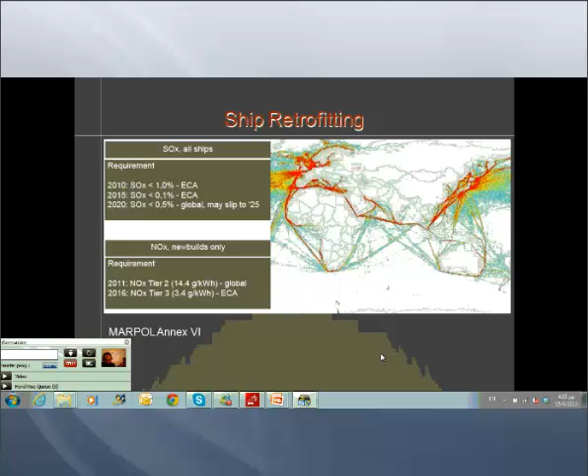However, there are some possible future ECAs which will of course take some time to be developed, and we are not sure yet about the actual time where these regions will be declared as ECAs. So one possibility is of course the Mediterranean Sea, and there is doubt on whether it will be a unified ECA region, or it will start with some smaller sub-regions and then develop further. For example, starting from the Adriatic Sea or some other specific region.

So other ECAs maybe are also estimated, maybe in Japan or in Singapore, or in the northern part of Norway, or even in the southern part of the United States.

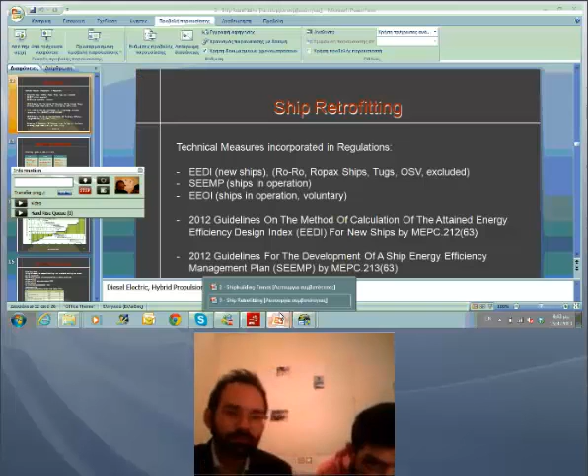Okay. So to continue, most of the ships in operation at the moment are starting to comply with the SEEMP requirement. So they have developed plans and they are carrying them on board. However, as this was, let's say, a compulsory action as we defined before, most of the operators are doing this without gaining any benefit and simply by implementing the regulation.

However, there are also more sophisticated operators that are trying to make the best out of the SEEMP regulation and also using the voluntary EEOI index in order to monitor their operational efficiency. Also, there are now a lot of ships built under the EEDI calculation, and there are new standards being developed for the actual certification of ships with the EEDI and the actual sea trials in order to verify the EEDI power

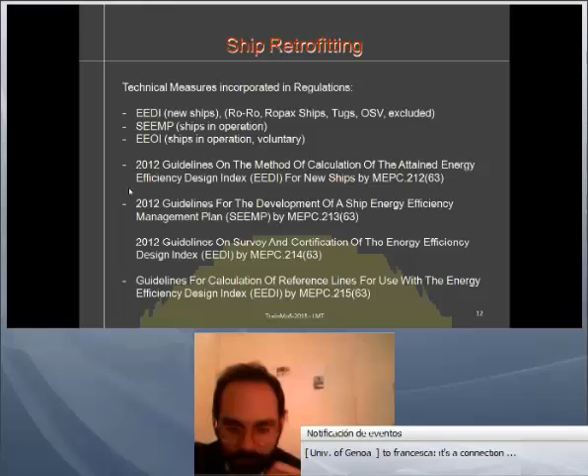line references. However, there is growing concern in the industry about the EEDI regulation and the possibility of having underpowered vessels in order to comply with the regulatory framework. So there is continuous research upon that in order to see what will be proposed for the future.

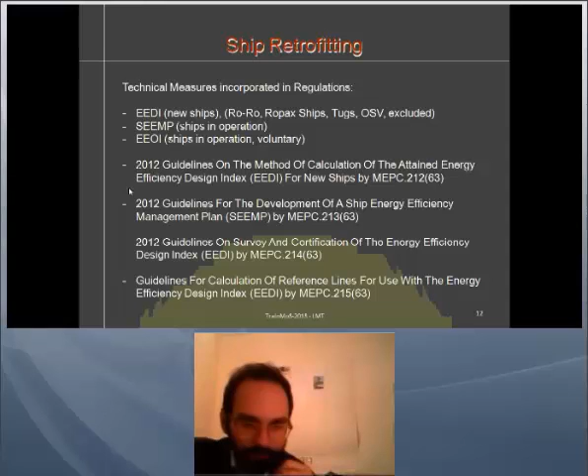So, retrofitting options to meet the SOx limits imposed by regulations. Firstly, we have LNG as a fuel. We have the use of marine gas oil.

Okay. So what are the differences between those three options? Firstly, LNG as a fuel. We said that, according to studies and prospects from manufacturers, shipbuilders and also designers, there is a significant retrofitting cost coming with the use of LNG as a fuel.

However, there is the importance of LNG fuel being at a lower price at the moment than heavy fuel oil, and it is also expected to remain lower than HFO in the future. However, there is an uncertainty about the spread between LNG, low sulfur fuel and heavy fuel oil, and we are not sure about the prices in the future.

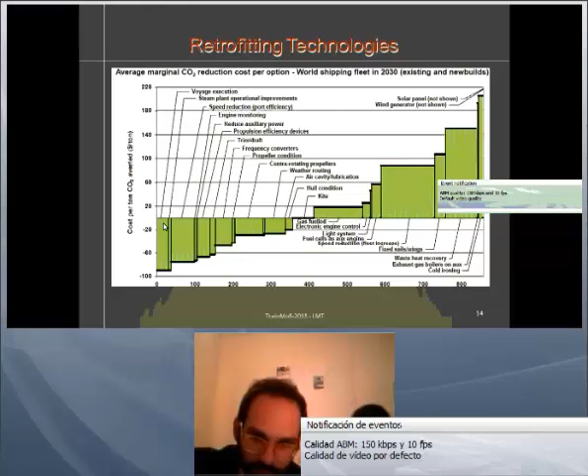So on the other hand, we have other measures that can be much more intensive in terms of cost. So let's say gas fuelled, that we said before, and then using fuel cells, wings, or waste heat recovery for exhaust boilers, or cold ironing, which actually depend very much on the state of the technology, or even on the infrastructure available for each ship.

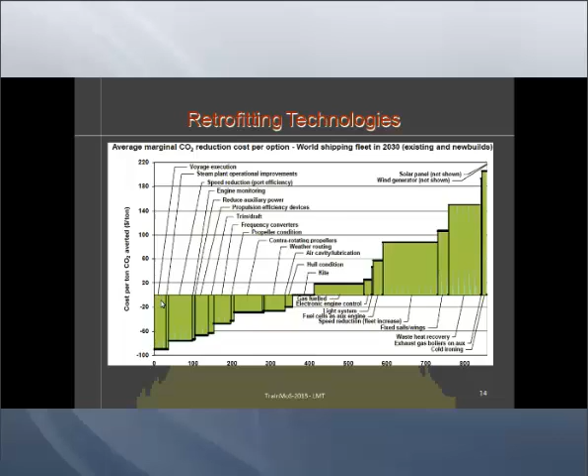So the market of retrofitting is expected to have a major uptake during the next years, and this is due to the regulations that are imposed, and the compulsory retrofitting that most of the owners need to do. So if we see the requirements of the IMO, the potential types of ships that need to be retrofitted are ships above 400 gross tonnage constructed before 2005, and of course also oil tankers constructed before 1996. Passenger ships are counted, and also ships constructed to carry ballast water before 2009.

Some insight on retrofitting technologies. For example, here we have a screenshot of a work on optimizing the bulb of an existing vessel. So as you can see here, it's evident that we need to take into account, as we said earlier, the main constraints of the vessel. You can see in the picture that the main vessel is kept intact, and we need to optimize for a bulbous bow that will fit into this existing vessel with existing dimensions.

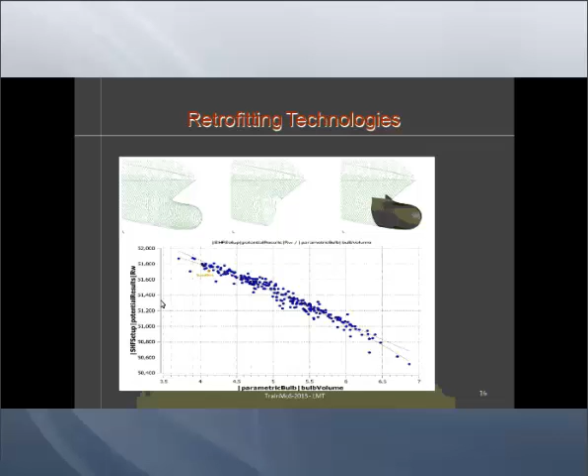Moving on with hydrodynamic optimization, there are various possibilities to enhance the fuel efficiency by using efficiency devices in the aft part of the vessel, like the Mewis duct or other kinds of ducts that improve the wake field of the vessel. Also retrofitting, for example, the skeg of the lower part of the vessel in order to improve the flow to the propellers. And of course, doing that in a simulation-driven environment gives you the benefit of creating a big number of variants and using the most optimal one.

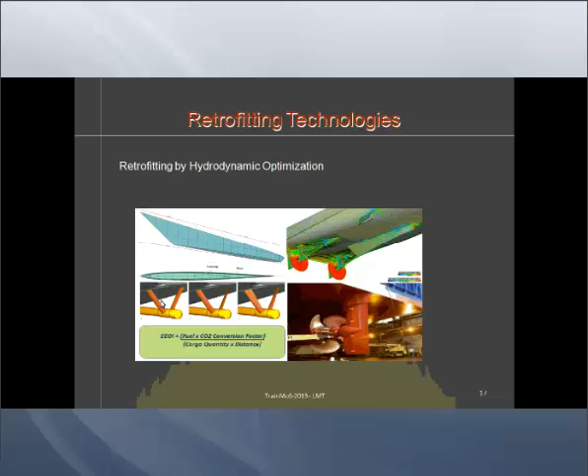Now we move on to retrofitting with scrubbers. Scrubbers have been used for a long time in the land-based industry, and they're more or less compulsory for big factories, mainly in Europe and America.

However, now they're gaining some part in the shipping industry due to the need of reducing the SOx emissions. So scrubbers mainly are used on the exhaust of the ships, and so let's say that fuel emissions are passing through the scrubbers, and the SOx elements are in a way neutralized, and their percentage drops to the required one.

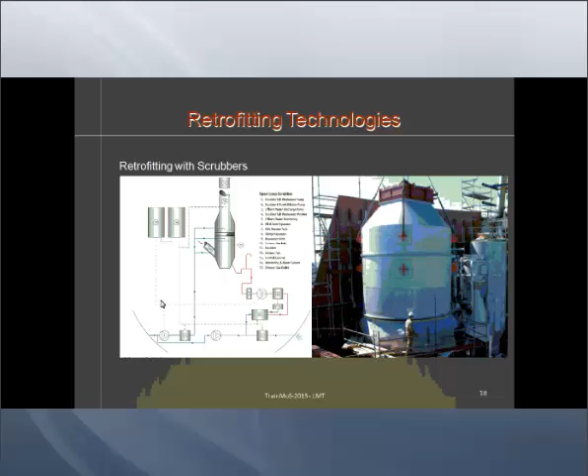So there are different types of scrubbers. There are the open loop scrubbers, the closed loop scrubbers, and also hybrid scrubbers. The open loop scrubbers use water, and also they use a catalyst, and then they need to discharge the water. While closed loop use mainly fresh water, and they keep it in a closed loop discharge. And there are some hybrid methods at the moment, and also some other methods that are still under development.

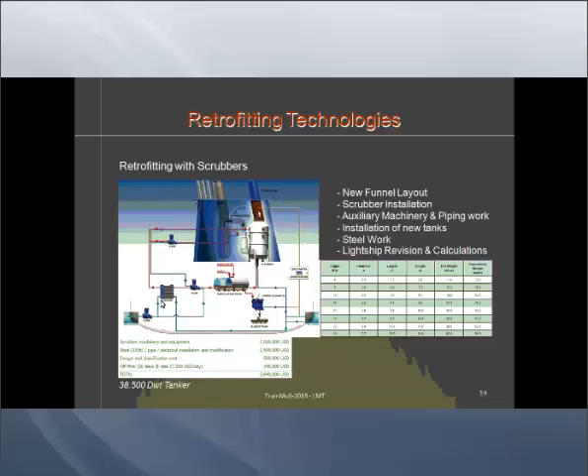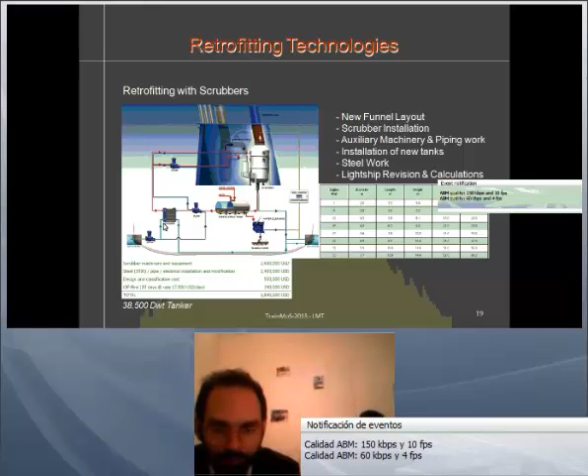However, the scrubber industry in the maritime is not very mature yet, and we expect to see big improvements in the future of this technology. However, retrofitting with scrubbers is a costly job, and it's very demanding. You need to account for a new funnel layout. You need to account for scrubber installation. Auxiliary machinery need to be put within the same scrubber, so you have multiple exhaust scrubbers needed, and there is also piping work to connect those.

Also, there is a need of installation of new tanks, mainly a circulating tank for either the open or the closed loop water. There is use of substantial steel work in order to extend and close the scrubber structure. And from that comes a lightship revision, and new calculations need to be done with regards to the vessel stability and statutory approval. And there is a possibility that due to the increase of weight, the vessel will possibly need to do an inclining experiment, increasing the cost. And also the added weight is reducing the deadweight of the vessel.

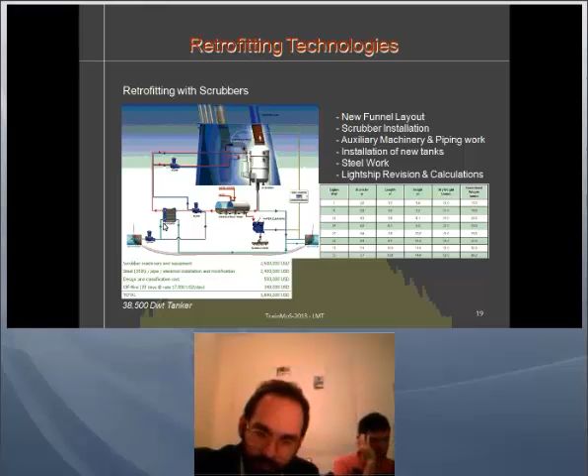So we can see here a case study from this organization called Green Ship for a 38,500 deadweight tanker, about the installation of a scrubber system. We see that the estimated cost was about $6 million, which is a substantial cost for retrofitting such a vessel.

And also in the graph here, you can see how the scrubber dimensions are changing according to the engine output. So this means that for vessels with a big engine output, the scrubber would be very large. Even for small vessels, the systems will be heavy for them to carry. So this is a big disadvantage in the scrubber technology, and will need to be addressed in the future for this technology to be sustainable.

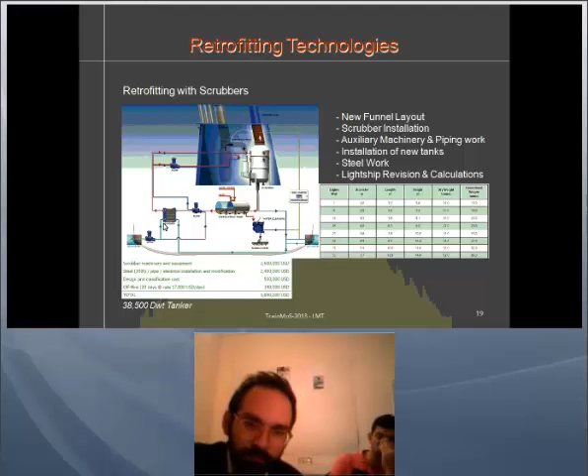Then you need a new fuel supply system. You need to remove the existing pipe to reconstruct piping delivery to the dual fuel engines. Also construct foundations for the storage tanks, and in general a lot of steel work. Again, you need to have a lightship revision and possibly have a lot of statutory work in order for the vessel to comply with the regulations after the changes it has.

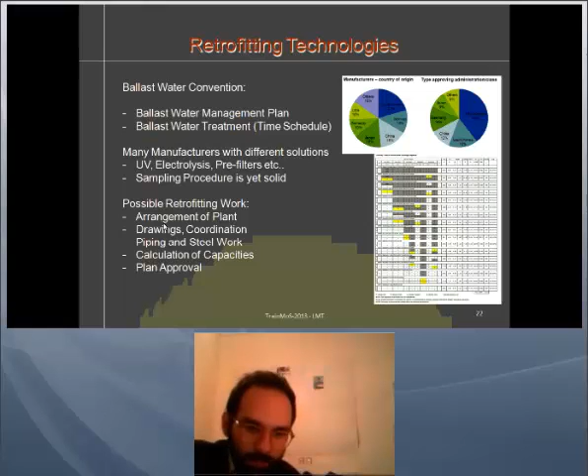So to conclude, expectations for the retrofitting market by 2020, 2030. Well, hopefully the economy will recover, starting new shipping and shipbuilding prices, also taking into account the pressure from such regulations that will put ship owners into thoughts of buying new ships rather than retrofitting the older ones. Economies of scale and widespread use of LNG will reduce the equipment cost; at the moment, a very substantial cost of retrofitting for LNG is the actual LNG equipment. Probably technology advancements will reduce the size and the cost of scrubbers. And there will be time until then to solve all the pending technical issues and possibly to train an adequate number of skilled seafarers to operate the new technologies installed on board the ships.